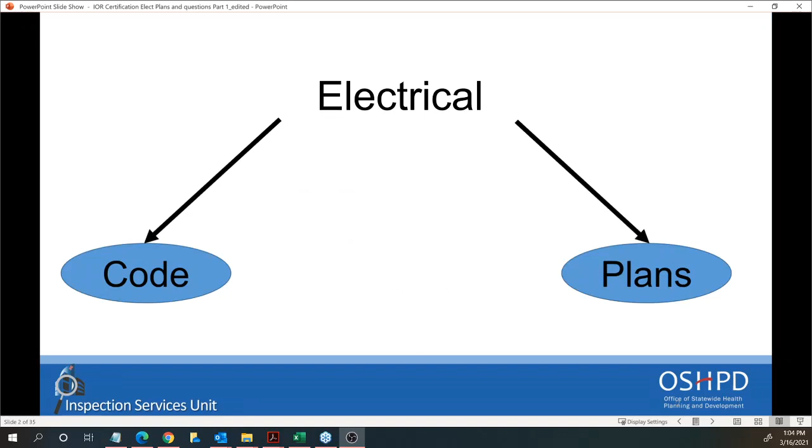The electrical discipline will have two parts of the exam: the code and the plans. The code will have 10 questions for Class A and 12 questions for Class B.

Let's see an example for electrical code questions, and just so you know, this question will not be used for the actual exam. The question reads: in elevator, dumbwaiters, escalator, moving walks, platform lifts, and stairway chair lifts, a sump pump located in the elevator hoistway should be permitted to be cord connected. The cord shall be a hard usage, oil resistant type of a length not to exceed blank, and should be protected from physical damage.

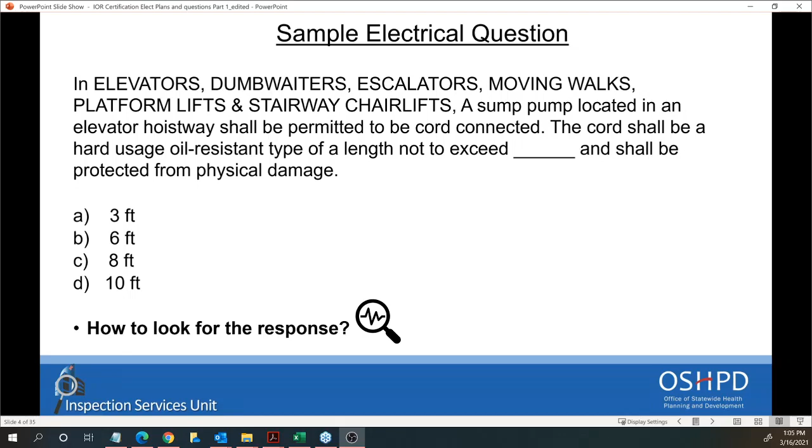There are multiple answers, and in this case there is 3 feet, 6 feet, 8 feet, and 10 feet. So how do we arrive at the answer? The electrical code has chapters like other disciplines. What you need to do is look for the elevator, dumbwaiters, escalator, moving walks, platform.

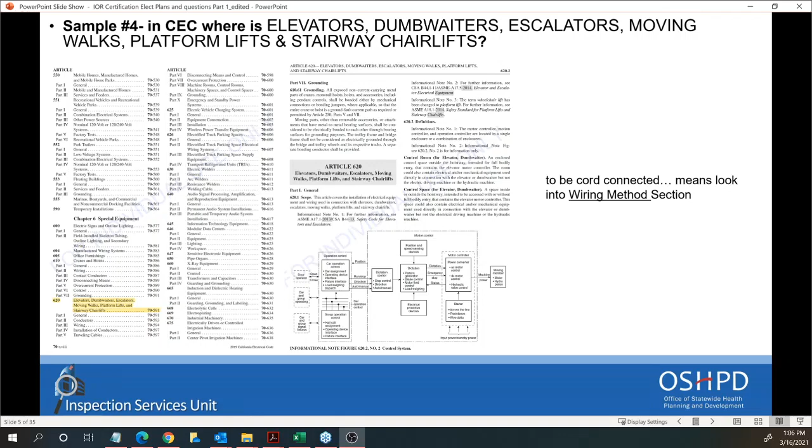Article 620 - so what do you need to look for? You need to look at the cord connection, meaning you should look into the wiring method section. So under Article 620, you need to look for the wiring method, and it is on the part with the tiny answer for sump pump, highlighted in yellow. The cord should not exceed 6 feet as highlighted, and that basically is the answer.

Now, because of the raised hand feature, and this is one of the examples we are showing you, please raise your hand if you have any question about this specific code question. Let's see if anybody has raised their hand. So far, I don't see any question, so I will continue the presentation.

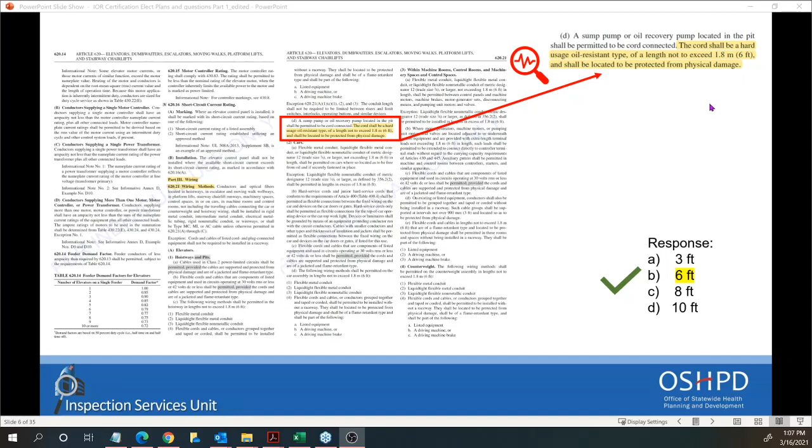For the plan, it will be for Class A, 13 questions, and for Class B, 9 questions.

Before going through the examples for the plan reading, we want to share, like we did for all the other prior webinars, a few things. For those who participated in all the webinars for every discipline, this will be a repeating portion, but some of you didn't participate in these webinars, so we are happy to repeat the information.

The reason for this type of webinar is to guide you through the right process for the exam. So let's analyze the questions with the correct responses, how to read them, how to interpret the question, and how to write the response.

Sometimes the approach is easy, and sometimes it's not, and this is exactly what happens in the actual construction process. Remember, the plans are not perfect, and this is why RFIs are always in process.

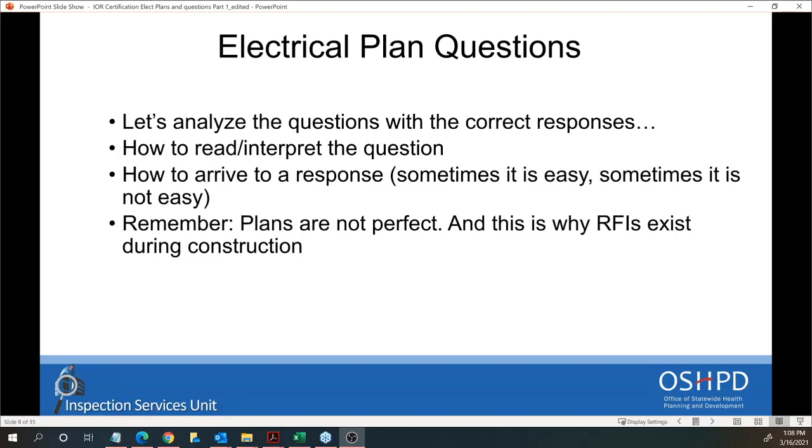What does approved construction document content include? They have the original approved set, they have RFIs like I mentioned before, they have no material alteration change, and they have material alteration change.

The information can be anywhere in the drawing, but usually the overall information is structured like this. General information of the project may appear on the drawing title sheets, and some specific information will be contained in drawing details and also in schedules.

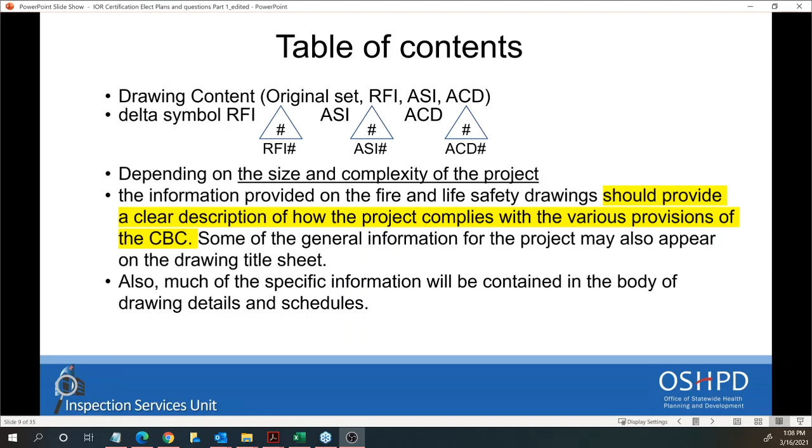This is an example of how a table of contents looks. You can see here the different disciplines, and this is, of course, the overall view with the different categories you can have in the set of plan documents.

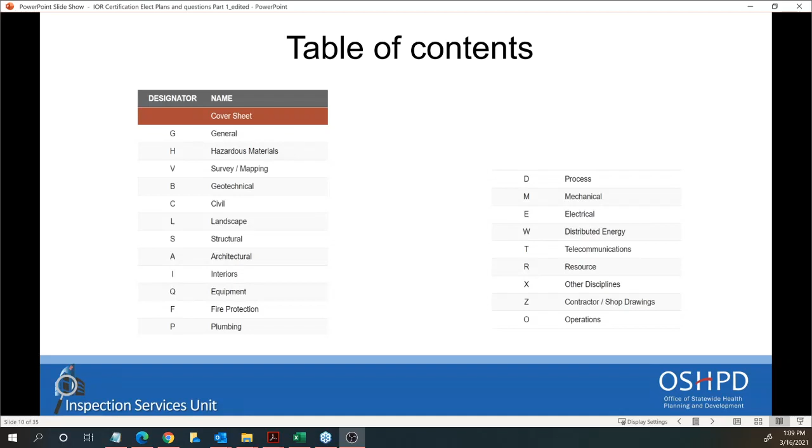Each discipline contains general information like symbol legend, abbreviations, and general notes specific for that discipline. They also have plans, elevations, sections, at different scales of drawing. And then there are details, scheduling, diagrams, and sometimes also 3D.

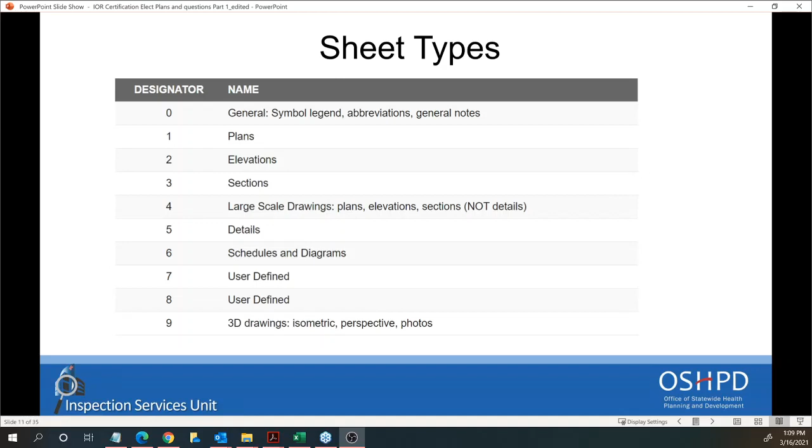In the example we are going to show you, you can see the different disciplines. The main ones are the cover page, the general notes, and the UL assembly. Sometimes the UL assemblies are included in the specific discipline, and sometimes they are in the general drawings. So again, you need to be flexible navigating through the set of drawings, because the specific information isn't always where you're thinking.

Today we're going through the electrical discipline, therefore we are going to show you what disciplines are relevant to answer the plan reading questions for the electrical portion. The electrical relevant drawings are, of course, the electrical discipline. Under this discipline, you can find schedules, tables, floor plans, enlarged plans, sections, details, and you might also need to look into the seismic restraint discipline as well.

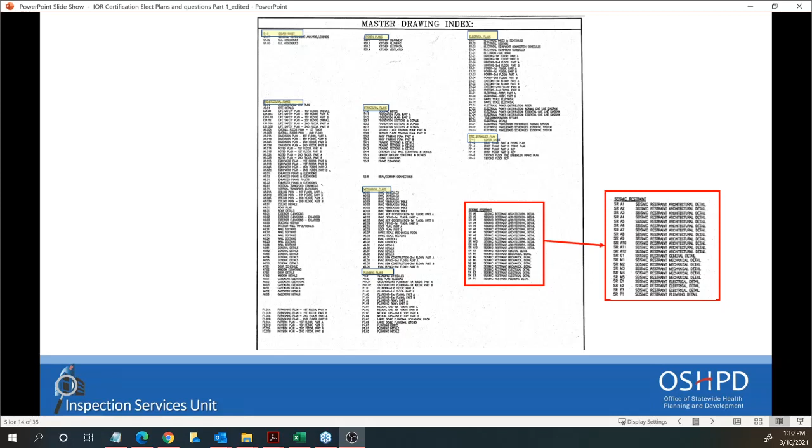Something we'd like to remind you is what you need to look for in the drawing. You need to look into notes, keywords, typical details, and general notes. But most importantly, you need to look sometimes across all the disciplines because, again, it is the entire set of drawings.

A good project provides all the disciplines that talk to each other. This means that sometimes information you might think is on the electrical plan set of drawings is not there, so you might need to look into other disciplines.

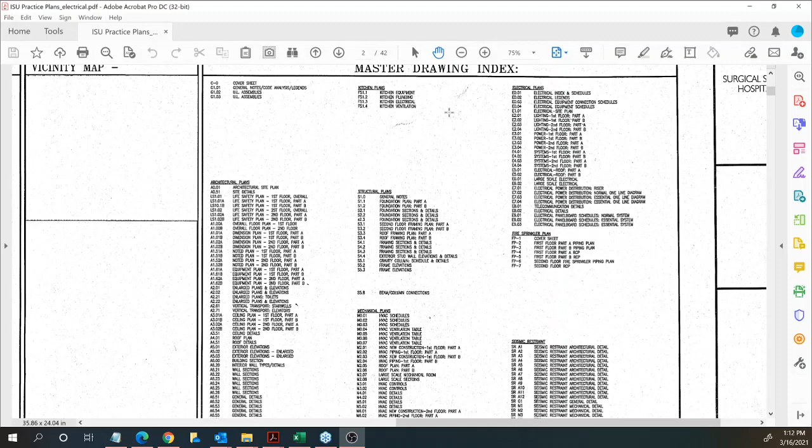If we zoom in on the index for electrical, we'll see it follows a general format that was discussed: the schedules, legends, lighting floor plan first, power floor plan, systems, electrical roof, the single line, and the panelboard schedules. One thing to note is they have the option of including the low voltage in the electrical set, and in this case they did. So that's the system drawings.

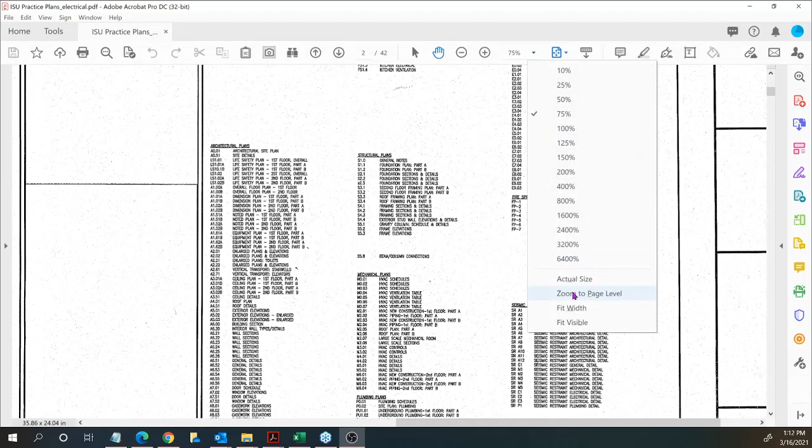Sometimes you'll see that there's a separate low voltage index. All right, if we start to flip now back to the electrical sheets, I'd like to take a few minutes to orient you to the sheets. So as we go to the questions that help us know what's in the set, where we might find our answers - life safety, obviously, is the exiting plans.

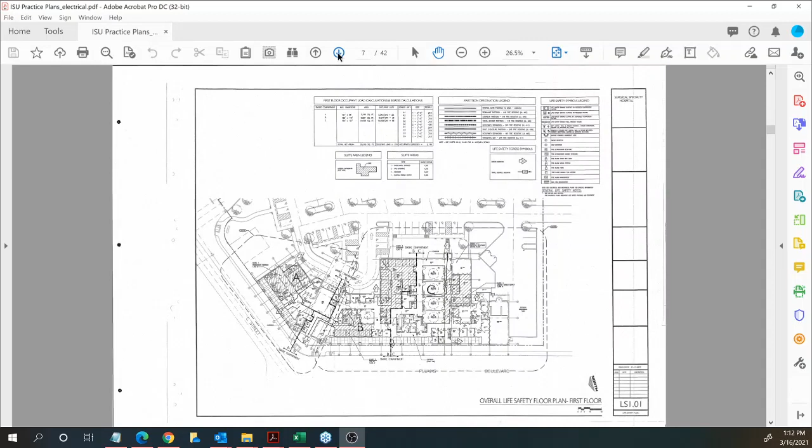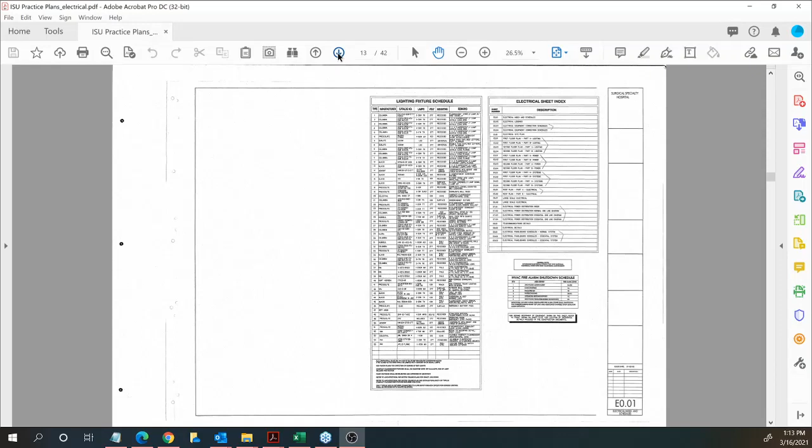We look at the electrical, we'll see on the first sheet, light fixture schedule, our sheet index. And we can go ahead and move to the next one. Over here, very important is our legend symbol list, the definition of all symbols that we see throughout the set.

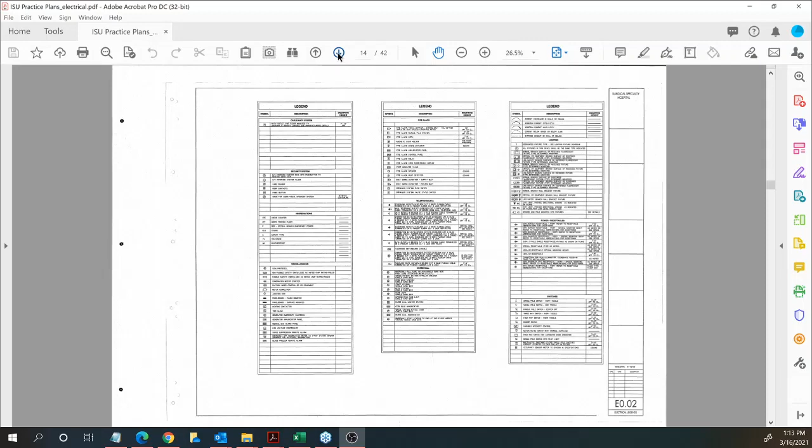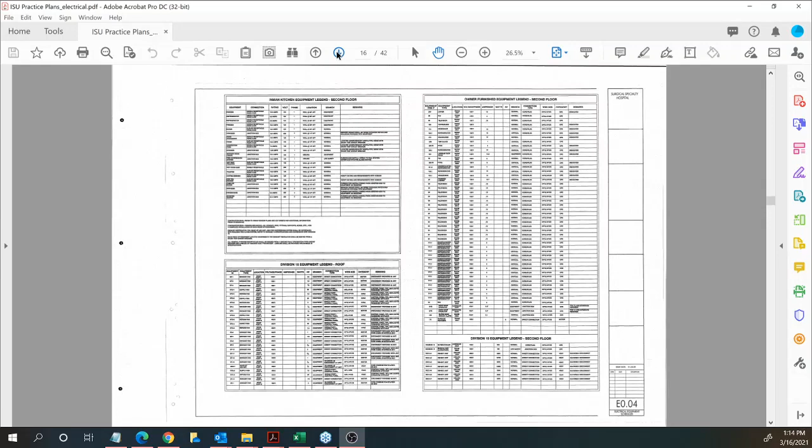Here we've got a site plan, exterior site lighting. It looks like there's some service equipment here. Then we move to the lighting plans, and this is part A of the first floor. There's part B, and you can see the legend down below where that is.

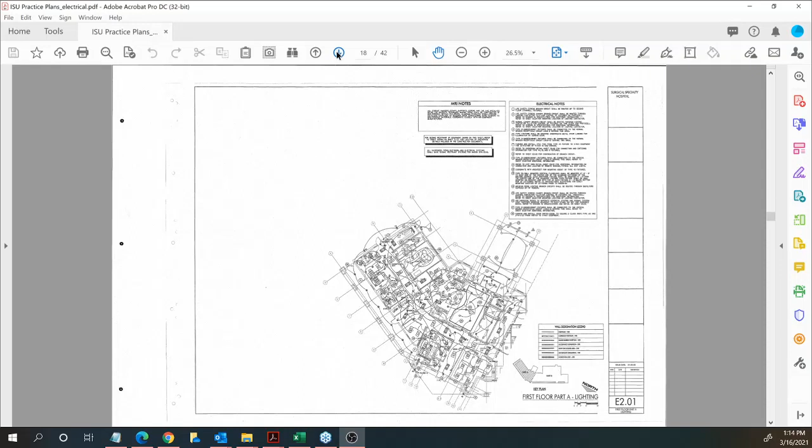And then there's the second floor, lighting part A, second floor lighting part B. So now we know it's two floors. We know there's an A and a B, and the power is going to be set up the same way. So we see first floor part A for power, first floor part B, second A, second B.

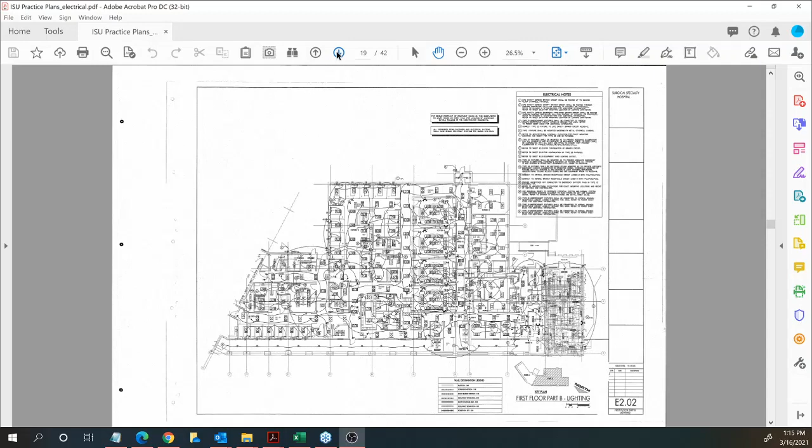And now we look at the systems - again, this is typically low voltage. It could be fire alarm, nurse call, paging, TV, data. And we see an overall, and there the systems has a part A, part B on the second floor. Then we see the roof plan.

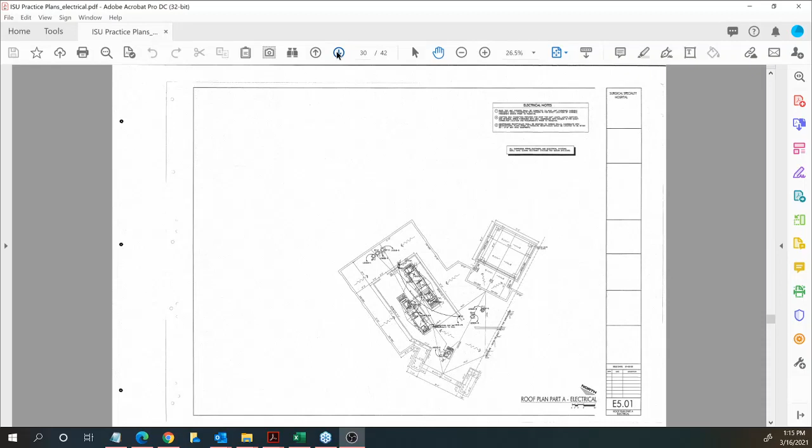So mechanical equipment located on the roof, we see where that's going to be. Again, part B for the roof. Then we see some blow-ups, enlarged electric room plans. You'll see this one on the top right is an enlarged large-scale kitchen, so we know there is a kitchen component. Typically that's very dense, so the consultants like to blow that up so we can see all the scope. So that's good to know where that is.

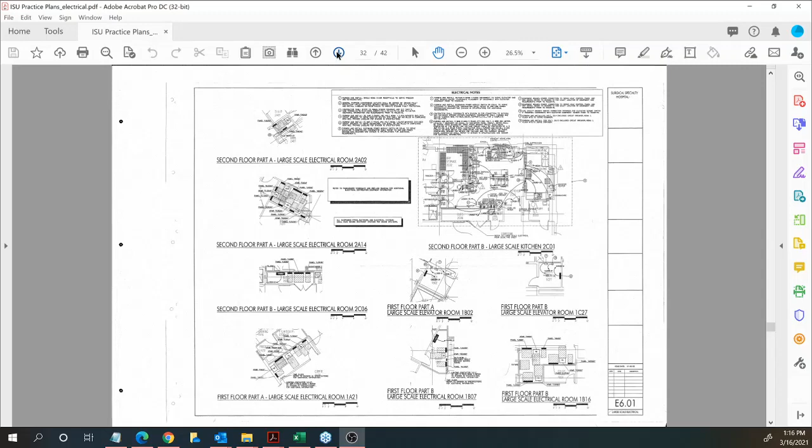Here's a single line. They basically use the Dapper Captor output from SKM Power Tools and use that as their single line, which is fine. This looks like that was normal, and this is probably emergency.

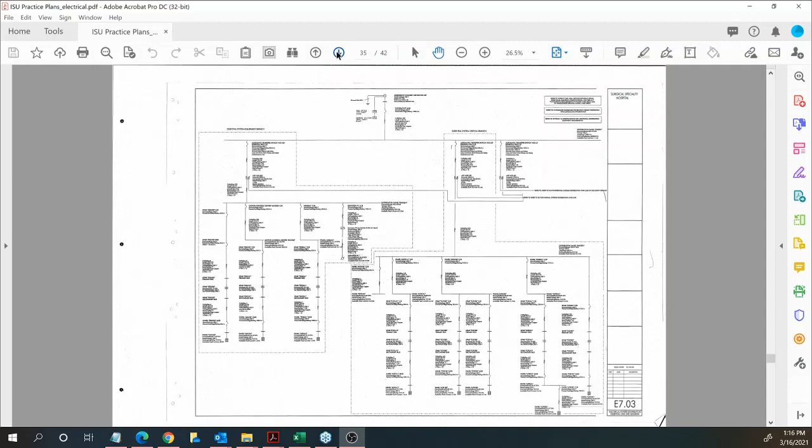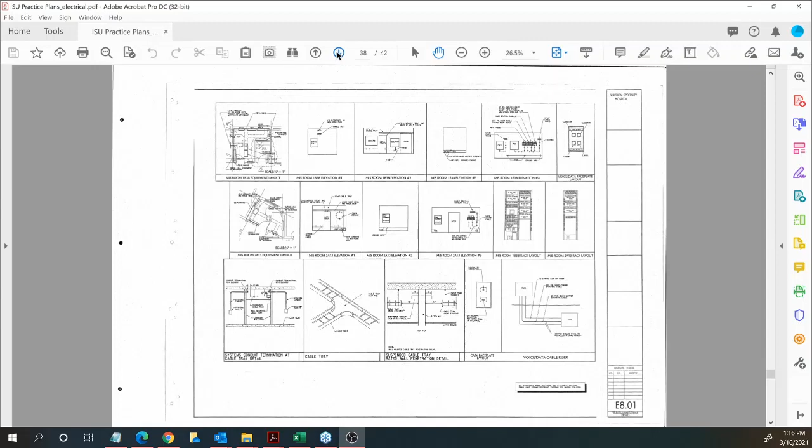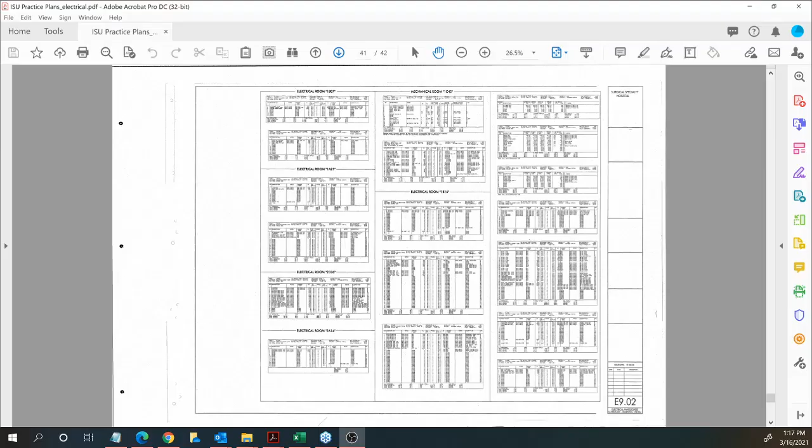Okay, so now let's jump to the examples. So the first question is: MATV outlet for floor-mounted television shall be installed at blank inches above the finished floor.

So a good place to start. Master MATV stands for Master Antenna Television. Where could we find the outlet?

So if we look down, remember we talked about the systems. We want to focus on system drawings to see where the MATV outlets are and how they're mounted. So we go to the next sheet. Let's take a look at the systems in a typical patient room.

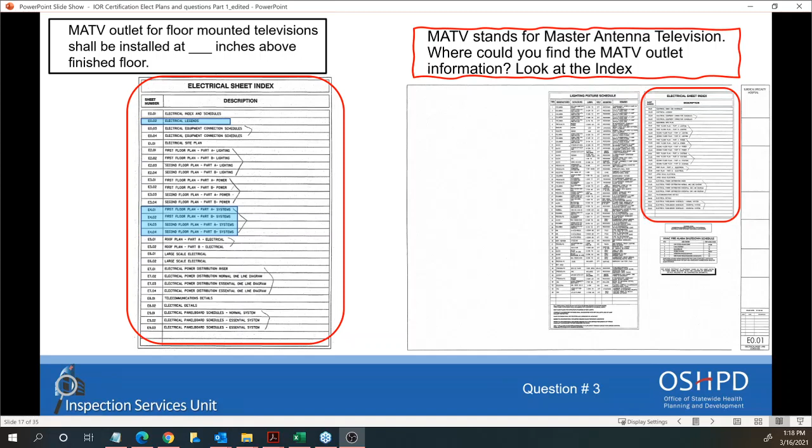We have this TF symbol. That might be obvious that that's MATV, but if we take a look at the legend, you'll see the legend is low voltage, and at the top there's a blow up on the bottom. So TF is for the MATV outlet for floor mounted TV, and the listed mounting height is 1 foot 6 inches. So our correct answer would be 1 foot 6 inches, which is the same as 18 inches.

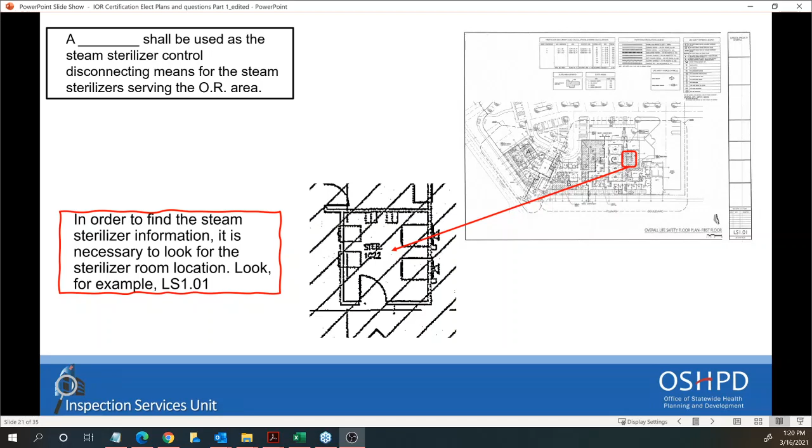Now, when I paged through the drawings, we could have looked a little bit, and normally I would, to see what areas are on what floor. But we'll see in the overall life safety plan on the first floor there's the sterilizer room, 1C22. So that looks like that's going to be area B on the power plan.

And if we take a look at area B on the power plan, we will see in that sterilizer room there's branch circuiting and there's notes. If you look at the notes, note number 2, which is in that room, says 120 volt, 1 phase, 20 amp connection provided for steam sterilizer controls, coordinate with equipment vendor. And then number 3 is furnish and install single pole switch, flush mounted in a single gang box, to service steam sterilizer control disconnect. So there we go.

Our answer would be the single pole 20 amp switch. Thank you, Jamie. As you can see, it was a little tricky because you had to look at note 2 and 3 because the single pole switch, and then the rating, was called out on a different note.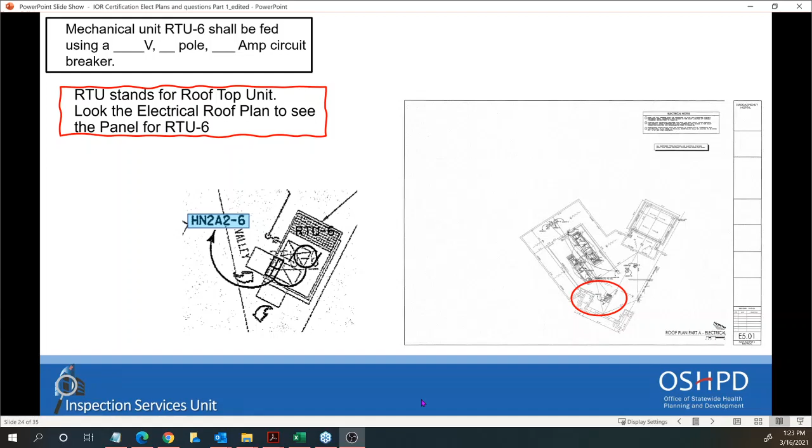We can certainly look on the roof because we know there's a rooftop equipment plan, and that should give us some direction. Another place we could look would be back in the front of the set. There was the mechanical equipment schedule. If you zoom in, the middle bottom is the mechanical equipment schedule, which identifies that it's going to be...

480 volt. Actually, I take that back, this is just to zoom in on the panel schedule. So we're looking at this panel schedule. We saw the home run on the other sheet. When we trace the home run, we're at circuit number 6, and we see there's a 15 amp 3-pole breaker. If we look at the voltage on that panel, it's 480/277. So we can go ahead and select number A, because that's 480, 3-pole, 15 amp breaker.

Just to look at it, we see it's 15.3, and then below that there's 2 dashes. That's just telling you that out of that panel, you have the option of 277 single phase. You have the option of 480 3 phase, which is what we're looking at here. There's another option of 480 2 pole, but we won't see that in these plans. So really, you need to look at the breaker and the voltage and then make the proper selection.

Very good hint. I like that.

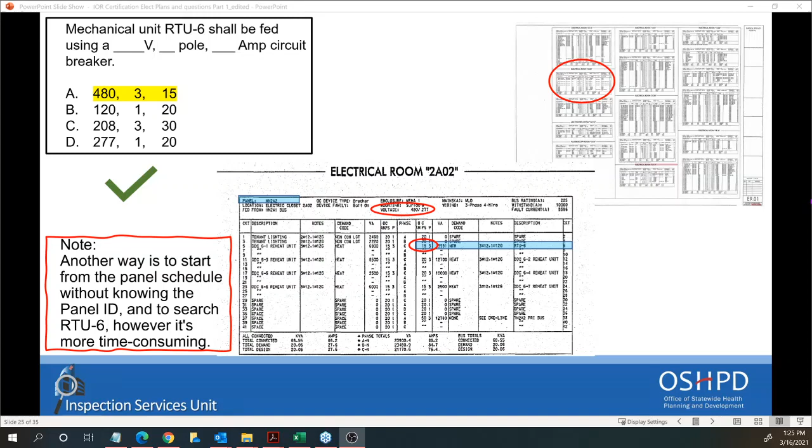How many light fixtures in patient room 2B12 are required to have dimmer switches? The first thing we can do is go ahead and look at the fixture schedule up front.

I mean the legend up front, and you'll see on the right is power and lighting, and it's highlighted, circled, and enlarged. You'll see that the symbol on this job is a switch, an S with a D next to it. The reason we do this is that while there are general simple conventions, all the engineers use a little twist on each one. So you need to go back to the legend to find out exactly what they're using for a dimmer switch. Sometimes it could be a box with a D in it. In this case it's a switch.

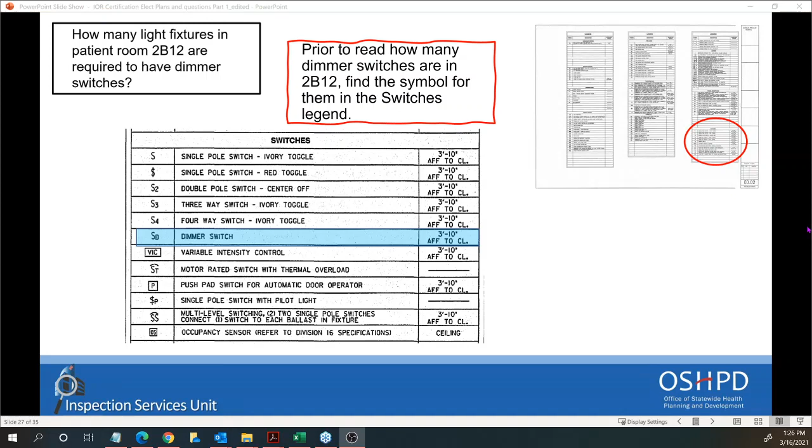So then, since it's a switch for lighting, we go to the lighting plan. We know it's on the 2nd floor, and it's either A or B, and it turns out in this case it's in the B floor plan. We find the room, we circle it, you can see that enlarged, and we look through the room and we see there's a switch as you enter the room with a D, a dimmer switch there, and there's a switch on the back wall with the dimmer. Everything else, all the other switches we see, are not dimming. So the correct answer would be 2 dimmer switches in this room.

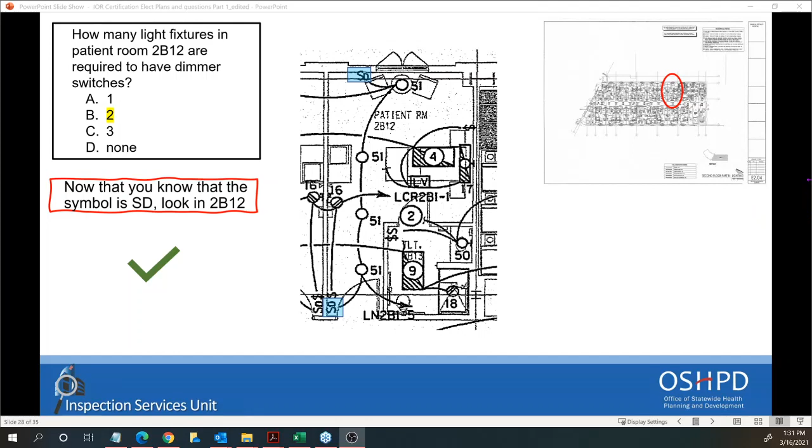Raise your hands again if there's any other question. I don't see any questions. So Jamie, let's go with the last example.

The concrete base for light pole fixture number 38 shall be provided with blank vertical reinforcement bars and number 3 ties at 12 inches, and extend blank feet below grade. As you recall, there are 2 things we saw previously: the site plan, and a detail at the end of the sheet for pole bases. So when we zero in on the site plan, we see the 2 fixtures, number 38.

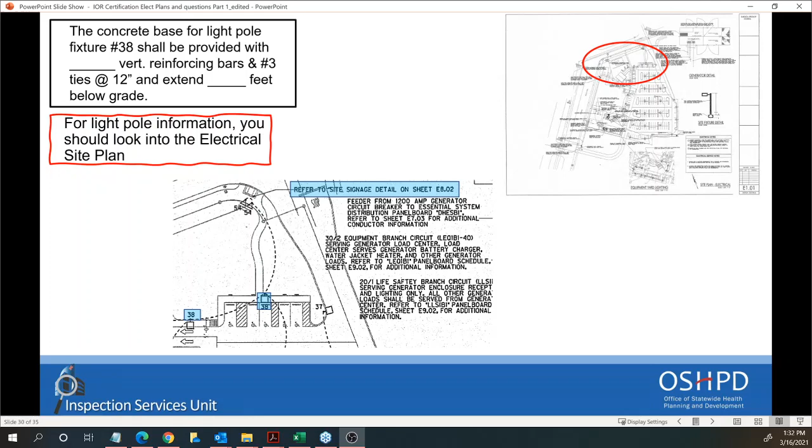We can go ahead now and take a look at the fixture schedule. We're looking at the fixture schedule now, which was on the first one of the first sheets in the set, and you'll see all the fixtures listed. For fixture number 38, it has a note that says type 4 distribution, 12-foot pole with 2-foot base.

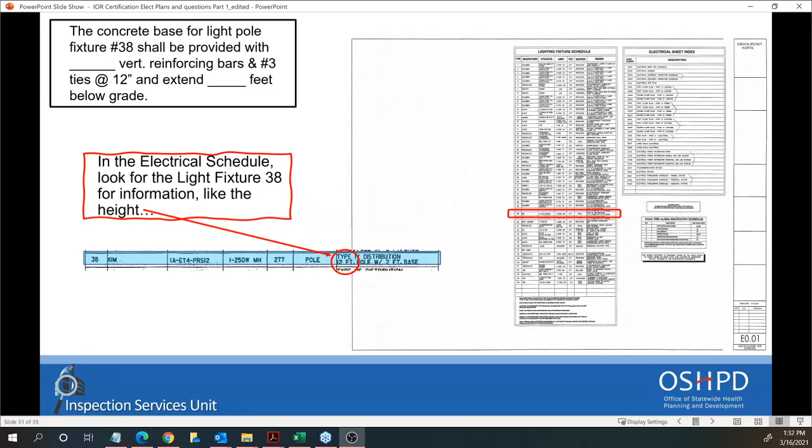Okay, now we have that information, let's go back and take a look at the pole base schedule. The pole base schedule says that for poles 15 foot and less, the depth below grade for your footing is going to be 5 foot, and vertical reinforcement is going to be number 6s. We see circular ties are number 3s, at 12 inches.

So the question was, the concrete base for number 38 shall be provided with blank vertical reinforcing bars. Let's check carefully. We come down the vertical reinforcing bars, and we see the number 6. Then extend blank feet below grade. Was that 5 foot 0 inches? So there's your answer. Thank you, Jamie.

One thing to point out is that, for instance, that was 12 feet. If you have something that's 18 feet, which doesn't show up here, you're going to have to go down to the 20-foot pole and use those requirements. In this case, they are the same, but it's a bit of a trick because it doesn't exactly match the pole height, so you consider up to 15 foot, up to 20 foot.

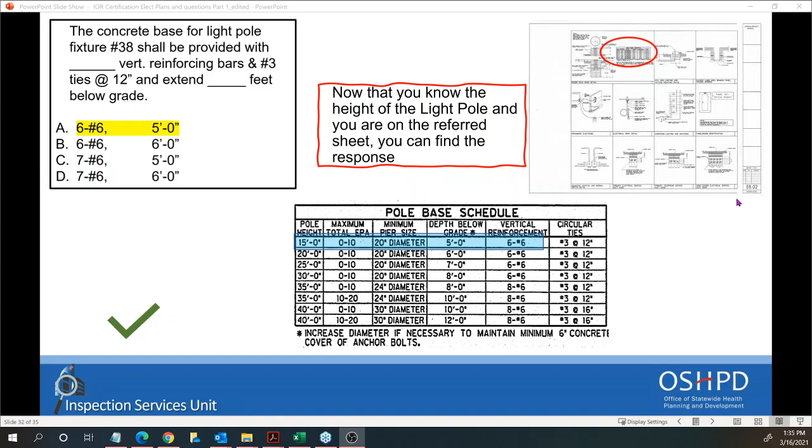That being said, what will be next is that on Thursday, there is homework that is not an obligation for you to provide us the answer. It's just practice for you, to see if with the logic and guideline we give you, you feel you can provide the answer. You can send the answer to us. Finally, here is the email we kept mentioning from the beginning: oshpod.fddisu@oshpod.ca.gov. So here is where, if you want, you can send us your response.

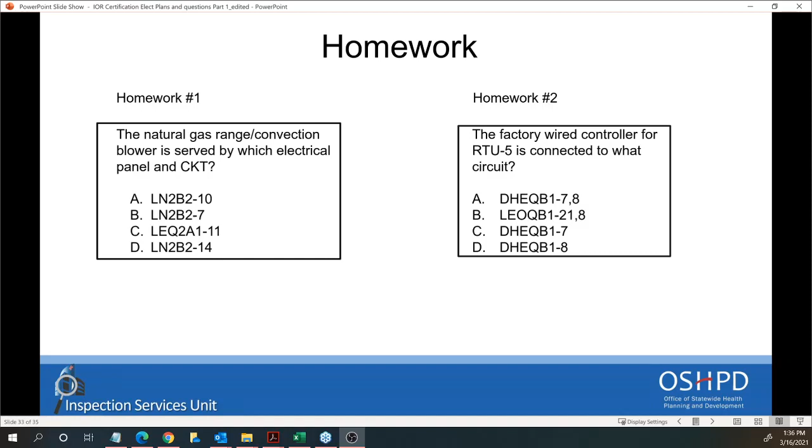On Thursday at 1 p.m., we will have a webinar, which will be much shorter than this one, because we will go through only about these two questions, the homework that I showed you here. An important part is that on Thursday, we will also upload additional extra questions for practice. So if you want, you can download them as well on Thursday when we upload them, and continue with your practice. And if you have any question, you can email us.

At oshpod.fddisu@oshpd.ca.gov. Again, electrical part 2 will be on March 18th.

Fire life safety part 1 will be on March 23rd, and fire life safety part 2 will be on March 25th. The instruction of the IOR exam, what to expect during the exam, will be on March 30th.

In order to register, if you haven't yet, go to our website, oshpd.ca.gov. Under there, go to Building, Safety, and Finance. From there, go to Form, Training, and Resources. Once you are there, go to Webinar, located under the Training, Education, Presentation, and Webinar section. You will scroll down to the Inspection Service Unit, and find the Hospital Inspector Certification Exam Prep Plan Reading section, where you can select the webinar you would like to register for.